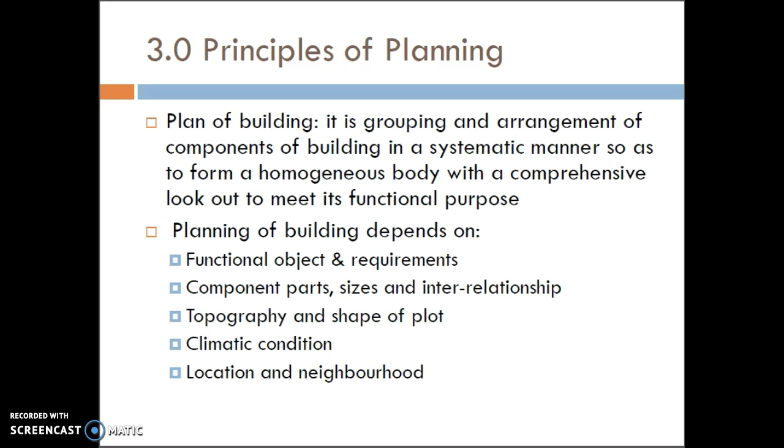So what are the points on which the planning of the building depends? Those are functional object and requirements, component parts, sizes and interrelationship, topography and shape of the plot, climatic condition, location and the neighborhood.

Now, while planning, it is not possible to consider all the aspects. So it would depend on plan to plan which aspect or principle should be given importance. Sometimes you will have to go for aspect and give furniture requirement a second priority, or sometimes you will have to go for furniture requirement and skip economy. So it will depend on your plan which one should be given first importance. So let's see one by one.

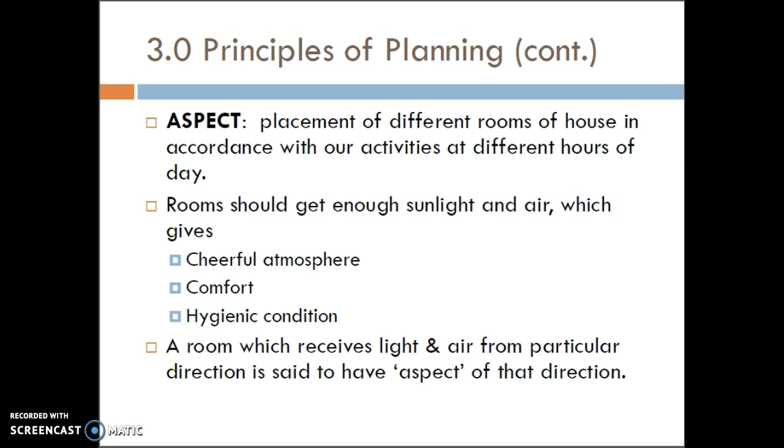First principle, aspect. It is nothing but placement of different rooms of a house in accordance with our activities at different hours of the day. So aspect refers to which direction our room should be, so that we can utilize our day, or our natural supplies like fresh air, sunlight, etc., in proper manner and with good amount. So rooms should get enough sunlight and air, which gives cheerful atmosphere, comfort and hygienic conditions. A room which receives light and air from a particular direction is said to have the aspect of that direction.

So these are the aspects of different rooms of your plan. Bedroom, the recommended aspect is southwest, west or northwest. Why is it so? Because one should be receiving plentiful breeze in summer. Kitchen should be in the direction of east and rarely northeast, to receive morning sun, which is germicidal. It purifies air. It should be well illuminated and cool in the afternoon.

Your dining hall should be in the direction of southeast, south or southwest, in proximity to the kitchen, and it will remain cool if provided in that direction. Your drawing hall should be in the direction of southeast, south, southwest or west, to receive adequate natural lighting during winter and obviate sun during summers.

Our reading hall should be in the direction of north and northwest, to receive light from the north being diffused and evenly distributed, and to have a cool atmosphere in the room that would be convenient for the reader. Our storeroom should be in the direction of northwest, north or northeast, so that it will be dark and cool, which is the proper atmosphere for storing vegetables or any household materials required for day-to-day life.

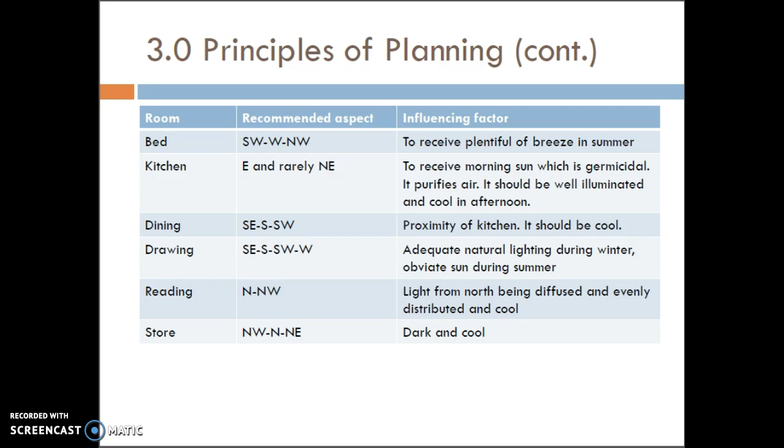So this was the first principle, which is called aspect.

Next one is prospect. Prospect refers to the view as seen from the outside, from the windows and doors in the external walls. It is determined by the view as desired from certain rooms of the house, for example a view of the garden or nearby hill. That is the example of how you are going to get a view of the outside from the inside.

At the same time, it is naturally intended to conceal some undesirable views. For example, there are certain areas which you want to hide, or you don't want your customer to see. So the prospect of the plan should be such that bad things are hidden.

Next one is privacy. Privacy can be of sight for both bath and WC, privacy of sound for confidential discussion or for the study room, and both sight and sound for bedroom. For example, our bath or WC should not be in the opposite direction to the drawing hall, so that one can get access directly from the drawing hall.

It will be very inconvenient for the person who is going to use our bath or WC. So it should be mostly attached to our bedrooms, or if possible, one should provide some kind of barrier between the WC-bath and kitchen, or the WC-bath and drawing hall, so that one can get proper privacy.

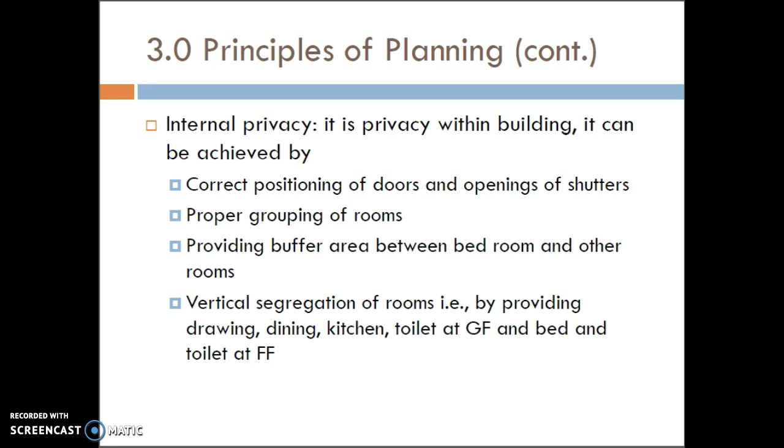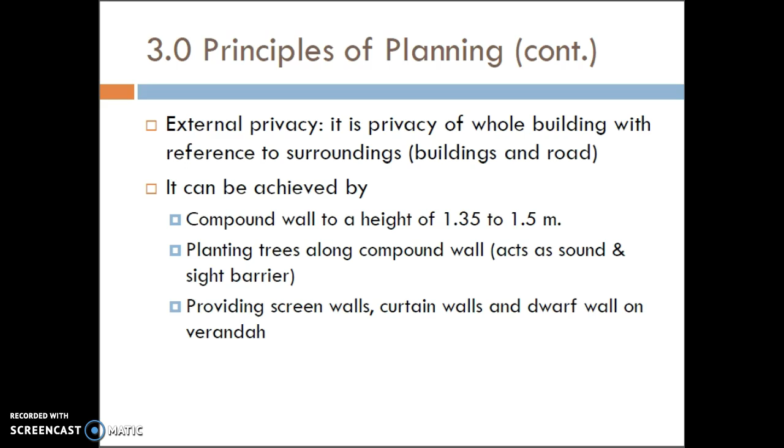External privacy is nothing but privacy of the whole building with reference to the surroundings. It can be achieved by a compound wall of height 1.35 to 1.5 meters, planting trees along the compound wall, and providing screen walls, curtain walls, etc.

On the veranda—next is the furniture requirement. Planner should know how much space is needed by each function. Room size can be completed on the basis of permanent furniture to be used, its dimensions and arrangement, and clearance for circulation.

Now while planning, one should consider these things also. Like if you are going to plan a drawing hall, before planning one should consider what kind of furniture the person will be providing.

There are certain common furnitures that everybody will provide. For example, sofas—everybody is going to provide a sofa. There will be a center table, and along with that, there will be a TV unit.

So one should plan the room in such a way that after providing this furniture, there is proper room for circulation, and after arranging the furniture, one should not get the feeling that it is not a balanced room.

So what is a balanced room? For example, you have planned a rectangular drawing hall and you have provided your furniture along the length of the wall. This will give you a narrow veranda kind of feeling if you are sitting in the drawing hall.

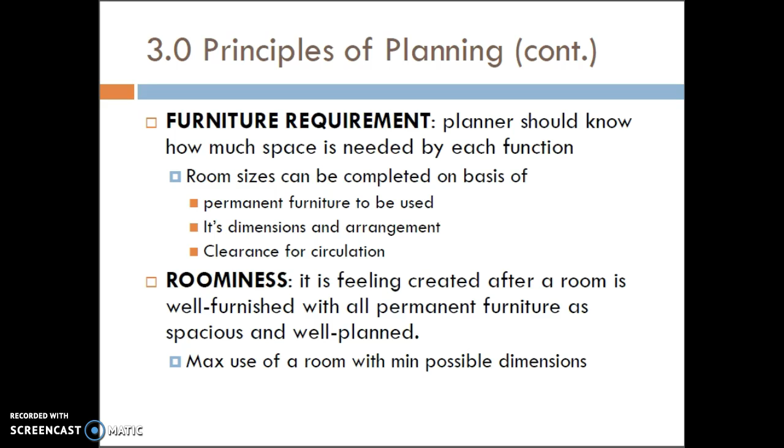So what are the points one should consider? Maximum use of a room with minimum possible dimensions. A rectangular room gives better outlook compared to a square room of the same floor area. Length to breadth ratio of 1.2 to 1.5 is desirable.

When it exceeds 2, it creates a tunnel-like feeling. Similarly, height also plays an important role. The room should have all proportional dimensions.

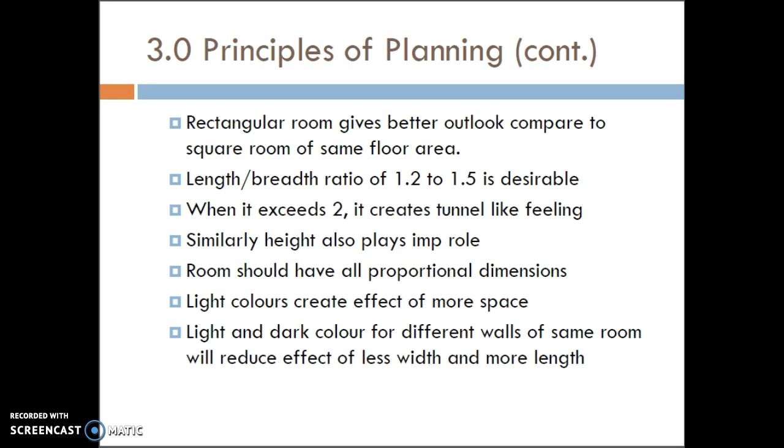Light colors create the effect of more space. Light and dark colors for different walls of the same room will reduce the effect of less width and more length. So color also plays a very important role if you want to provide proper roominess for your room.

Next is grouping. Grouping is nothing but proper arrangement of your rooms. For example, one should not provide a WC in front of the kitchen. Kitchen and dining hall should be grouped together, and you can group the drawing hall along with the kitchen and dining hall.

Bedrooms and toilets should be grouped together. You can provide a dressing room along with the bedroom also. So points to be considered are: veranda adjacent to the drawing room, dining room close to kitchen, and bedroom, toilet and dressing room grouped together. Bath and WC should be nearer to each other.

Staircase should be easily accessible from all the rooms. WC should be away from dining, due to the psychological feeling of being away from an insanitary space.

Next aspect is circulation. It is access into or out of a room—it is internal movement inside the building. It should not affect privacy nor interfere with utility. There are two types: horizontal, which is circulation within the same floor, and vertical, circulation between different floors.

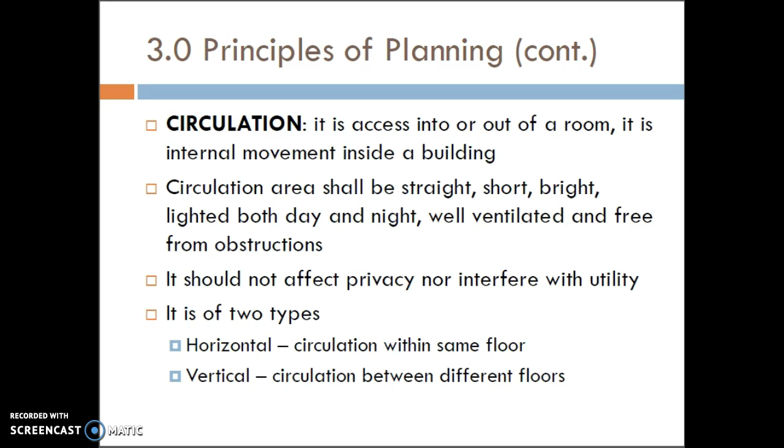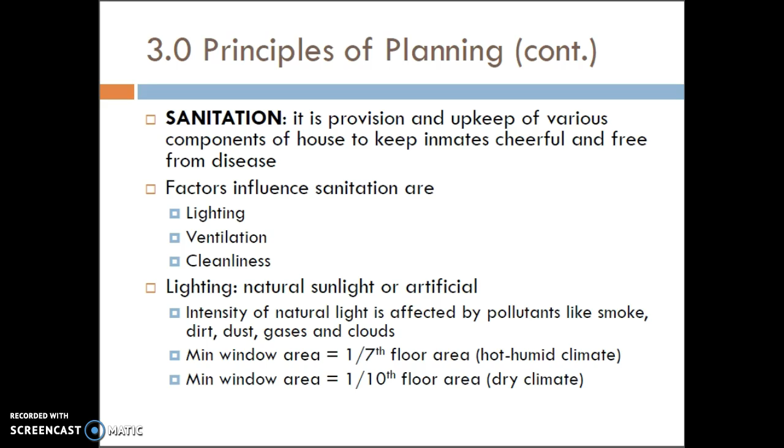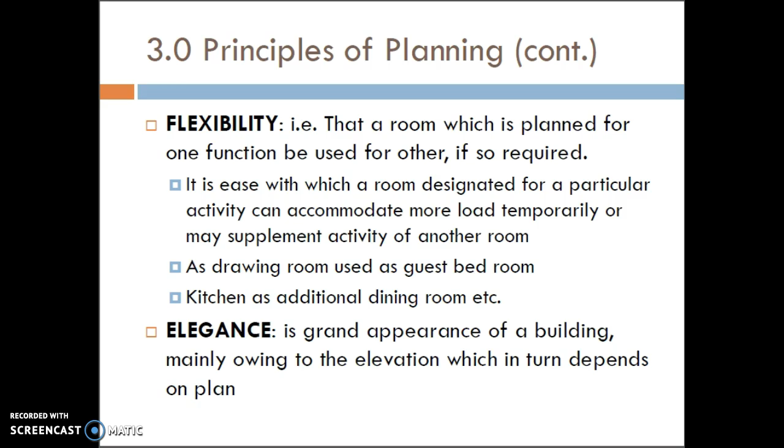Next principle is elegance, which is nothing but...